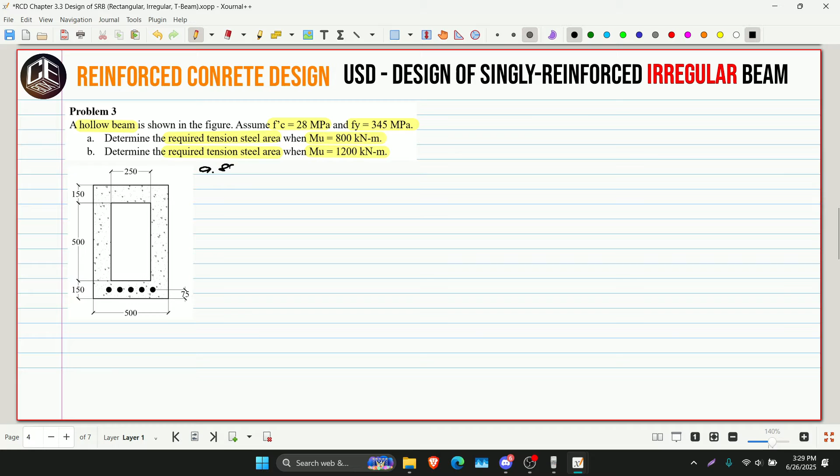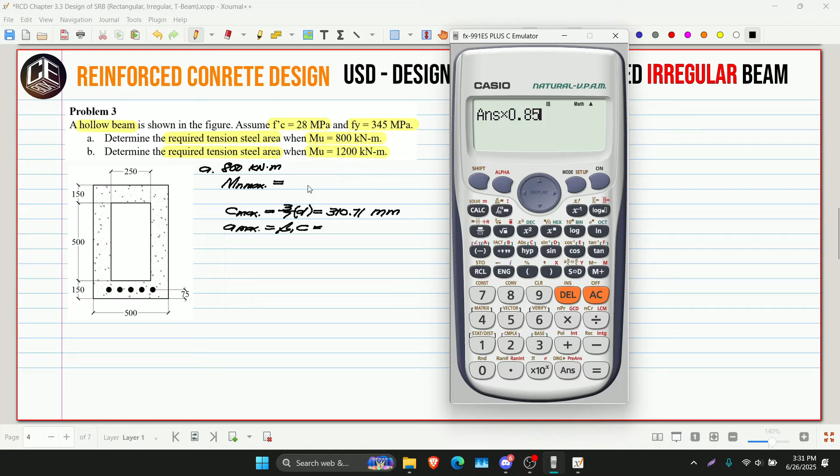Then let's get Amax, so we can determine how far the compression block extends at the top. This is beta 1 multiplied by C. Our beta 1 is 0.85 since our F'C is equivalent to 28 megapascal. So this is 264.11 millimeters, which is greater than 150. Since it's greater than 150, the compression block is here.

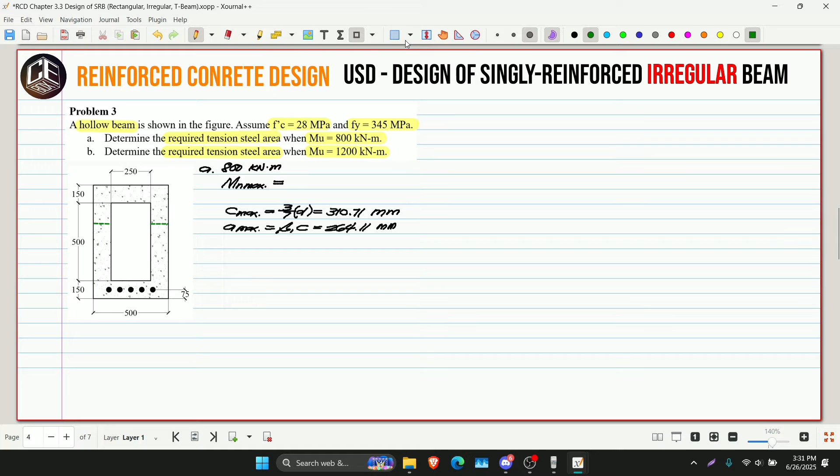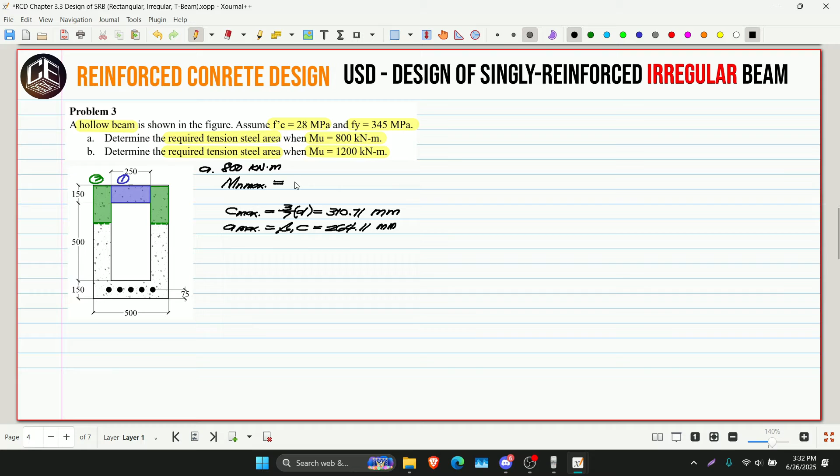Then we will have two compressive forces: one here, and this one. So from our figure, we'll have an equation for Mn max, from the green area and the blue area. Let's call this one 1, and this one 2. So this is C1 multiplied by D minus 150/2, then plus C2 multiplied by D minus A, over 2. So how do we solve for C1 and C2?

Of course, those come from the compressive force of the concrete. So our C1 is equivalent to 0.85 F'C multiplied by area. The area is 250 times 150. Then this is our C2: 0.85 F'C multiplied by area, where the area is A multiplied by thickness. The thickness is 250, and this is 500, so 500 minus 250 is 250, then divided by 2 is 125, multiplied by 2 since there are two of them.

Then we can get C1 and C2. So this is 892.5 kilonewton. And this is our A: 264.11 times 125 times 2, divided by 1,000, giving us 1571.45 kilonewton.

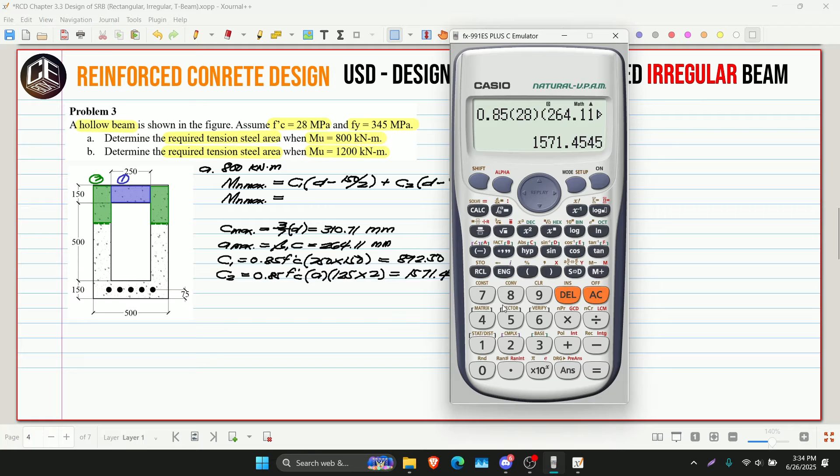So now we can get our Mn max. What was our D again? We forgot, right? Our D is 725. So, 892.5 times (725 minus 150 divided by 2), plus 1571.45 times (D minus A), where A is 264.11, over 2. Then divide by 1,000 to convert to kilonewton-meter. This gives us 1511.91 kilonewton-meter.

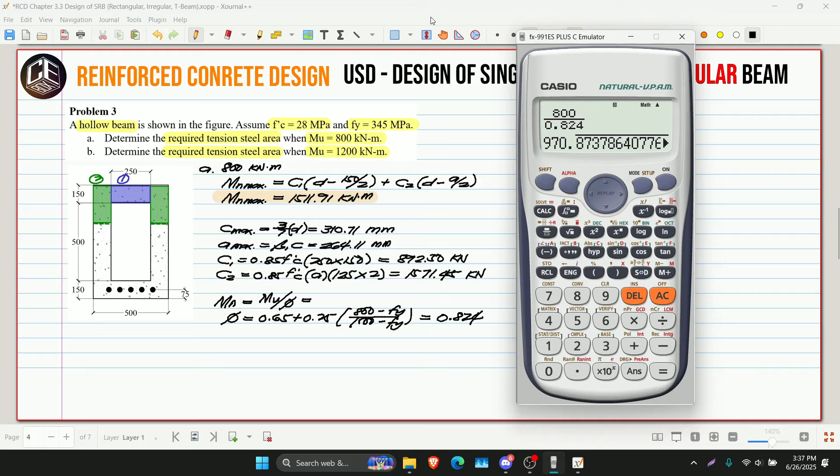So we can get our Mn: 800 divided by 0.824, which gives us 970.87 kilonewton-meter. Since our Mn max is greater than our Mn, therefore we are still under singly reinforced beam, or SRB. Okay, step number 2.

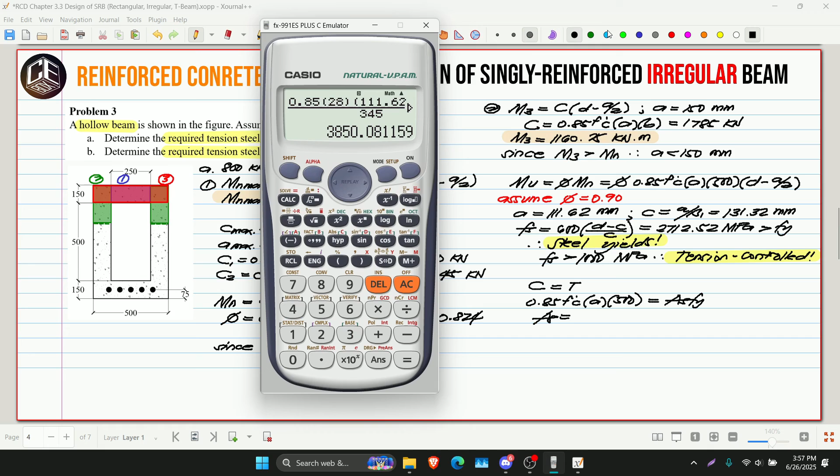So, ngayon, pwede natin makuha yung AS by simple equilibrium condition. C is equivalent to T. So, 0.85 F prime C multiplied by A multiplied by 500. Then, equivalent to AS multiplied by Fs. Ang ating Fs is Fy since nag-yield yung bakal. So, ito yung ating Fs: F prime C 28 multiplied by A, A is 111.62, multiplied by 500, then divided by Fy. Ang Fy natin ay 345. So, ang ating AS is 3850.08 millimeter squared.

Ang tanong ngayon dito is, Sir, paano po kung hindi po siya nag-undergo ng transition zone? Ano pong gagawin namin? Magandang tanong yun. Palitan nyo itong phi, no? Ang magiging phi nyo yan is equivalent to 0.65 plus 0.25 multiplied by 600. Kasi kailangan natin malaman yung C, no? Multiplied by D minus C over C. Then, minus Fy over 1,000 minus Fy. Ayan, substitute na lang dito yung phi. Parang lang din sa problem 1 and 2, no?

Tapos, pag nasolve nyo na yung C, masolve natin yung C, masolve nyo yung A. Tapos, kailangan nyo mapatunayan yung Fs. Kailangan nyo resolve yan. So, dito kasi, since hindi tayo tumugma, hindi siya kumbaga yung Fs natin dito tingin ko sa condition na to. Sige, i-shade ibang kulay. Tingin ko, ang condition na to is yung Fs natin ay papasok sa limit ng 345 and 1,000 megapascal. So, kapag ganyan na nangyari, ibig sabihin nga, mali yung 0.90, no?

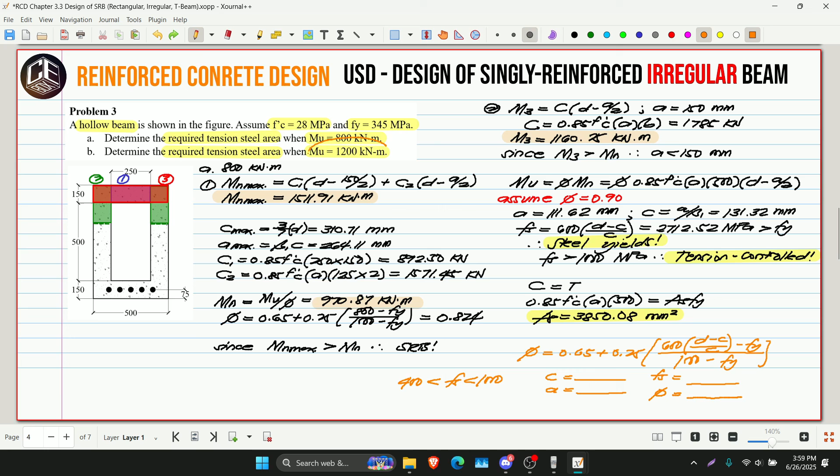So, siguro, hanggang dito muna yung ating problem number 3. So, magiging second part na lang ng discussion natin na kung saan yung given na moment ay 1,200 kilonewton meter. So, that's our example problem.